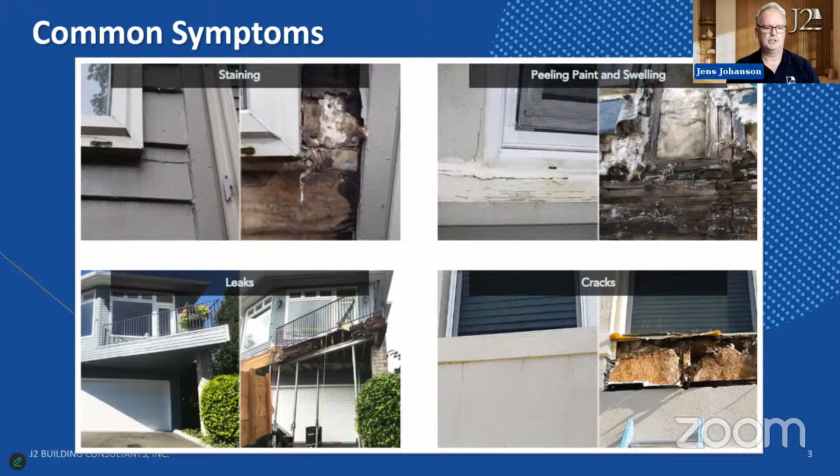So anyway, we're going to jump into common symptoms. These are on our website - if you go there, you'll find a page called Common Symptoms. We're looking for staining, peeling paint, cracks, and maybe bounciness of decks or roofs, sponginess, and water coming out of these areas. Here's some teasers, but you'll see this on our website. Carolyn's going to put some things in the chat, some YouTube videos or common symptoms there.

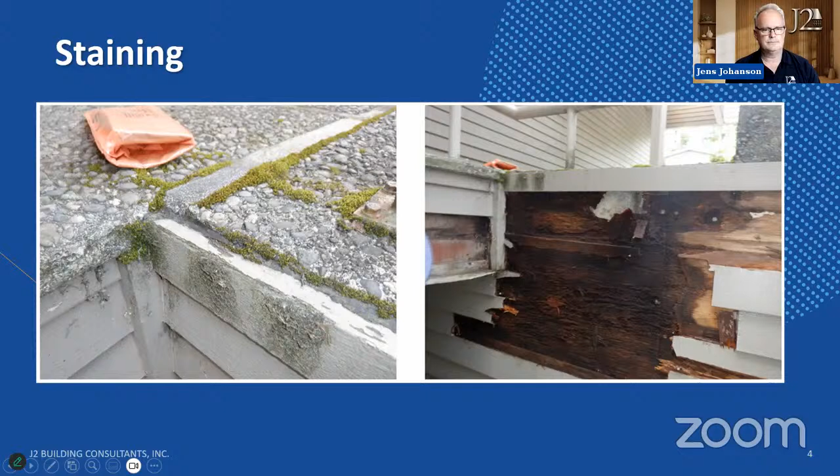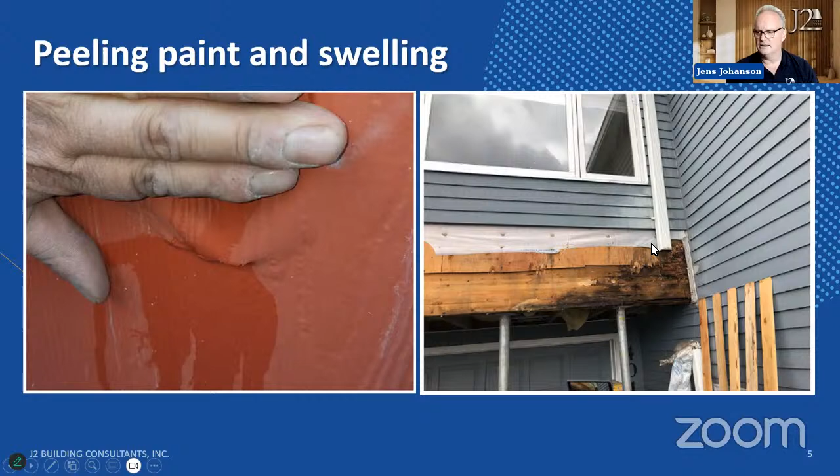Why do I have moss growing in my patio, and why does it seem like the water is running down the siding? Well guess what - it is running down the siding, and your plywood now looks like a big mess. Why do I see these blisters with water coming out? Why do I see some funny shading and staining on the siding here? Well, that's because we've got water leaks in there. These are symptoms of ponding water.

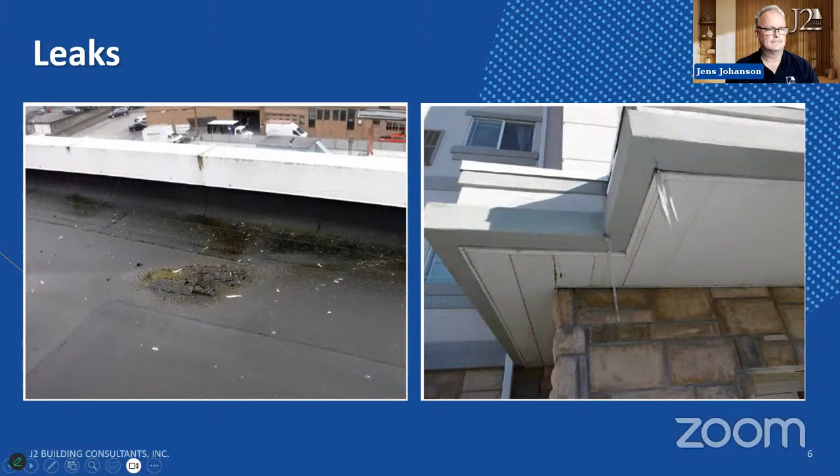I've seen icicles come out of ledgers or gutters, but we shouldn't see icicles coming between the gutter and the roof sheathing. And cracks can matter - here's a big crack, here's some water staining on it. When we pull that away, whoa, we see some problems. So these are symptoms and what lurks under them.

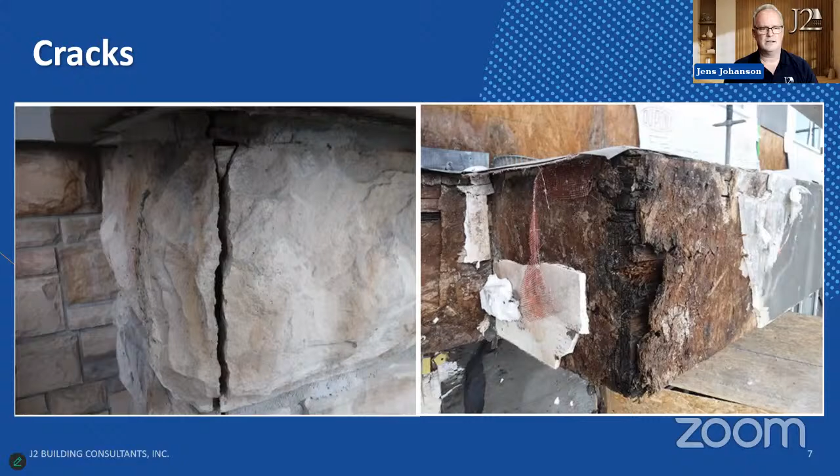Now let's jump over to the case studies. So 1 of 18, we've got lots of these. This one is the most classic walkway kind of thing. If you've got an elevated building, you're going to have walkways, staircases, all sorts of things. Here we can see the beams, some of the rails, even the beams on the outside - they look fine. We pulled off some siding to peek around, but you can see the sealant.

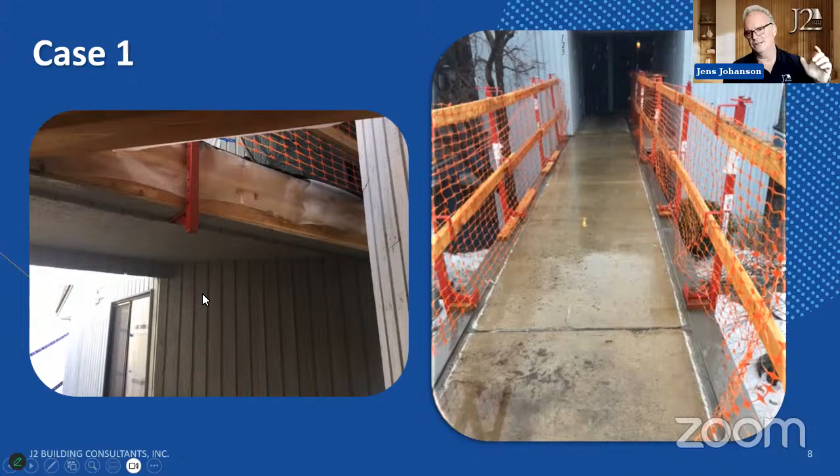So who has installed the sealant over the years? We've got a few different colors of sealant, so we know they've kept applying and applying and applying. Actually, we had finished our investigation here, and it was right at the end where we literally went over and knocked on a beam to see what was going on inside. And so this is what we found.

We can start on this right-hand photo - you can see it's pressure treated beams, you can see the pressure treating from the outside, you can see the knife marks. But on the inside, the pressure treating only goes so deep - the inside is totally rotted out. These beams are basically hollow. So it's a combination of beams and posts.

Here's some big support beams that come into a three-way T intersection. There's a lot of load being carried here, and there's not much left of those beams. Here's some cross sections of a post - again, 50% of the post is gone here. Over here, it's 90% of the post.

So a real good reminder that we can look at the outside and it looks fine, but you start just doing a variety of things - why is it hollow, why is there staining here, why are there weird cracks, where is the staining coming from, why are there 5 different colors of sealant, who's caulking stuff to death. So we've started looking at beams and posts in a whole new way after this project, and there's actually some interesting tools that can help us with that.

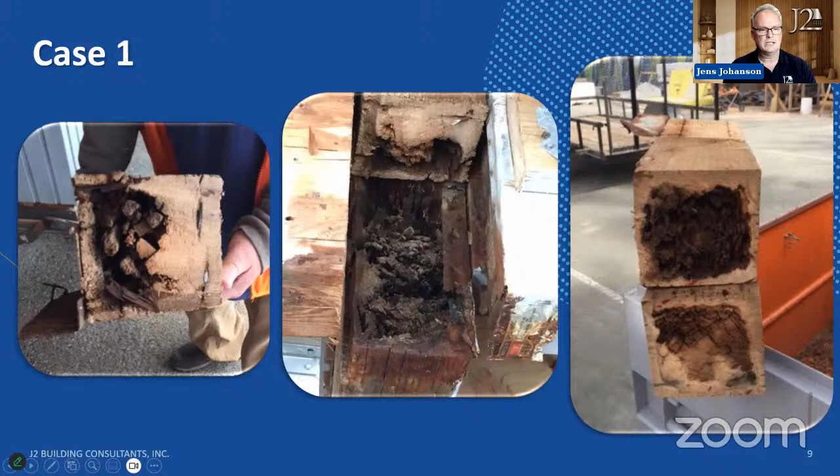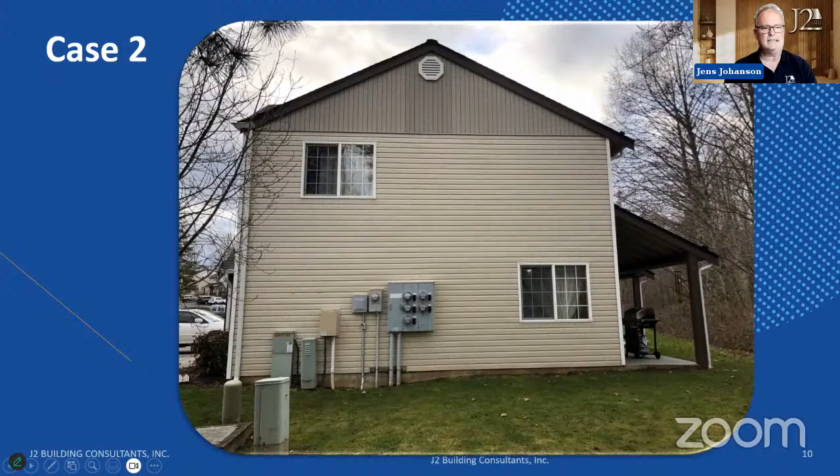Thankfully it's vinyl siding, very easy to pull off. If you have vinyl siding, it just unzips and then you can zip it back up. So if you've got vinyl, it's easy to look. So here's what we find underneath.

On the second story, you can see the water coming in from that roof leak running all the way down. Here's that panel, I'll show you a couple photos of that later, but look at the second floor with its excessive steam and moisture buildup.

We've got multicolored OSB water damage on the outside of it, but it's really coming through in these stud bays, if you will. You can see the clean areas are where the studs are. And what we found was they were totally missing insulation in the cavities.

And there was complaints of this unit's always cold. That's why I have the heat cranked. Well, we have the heat cranked, so that's why we're condensing on the cold windows.

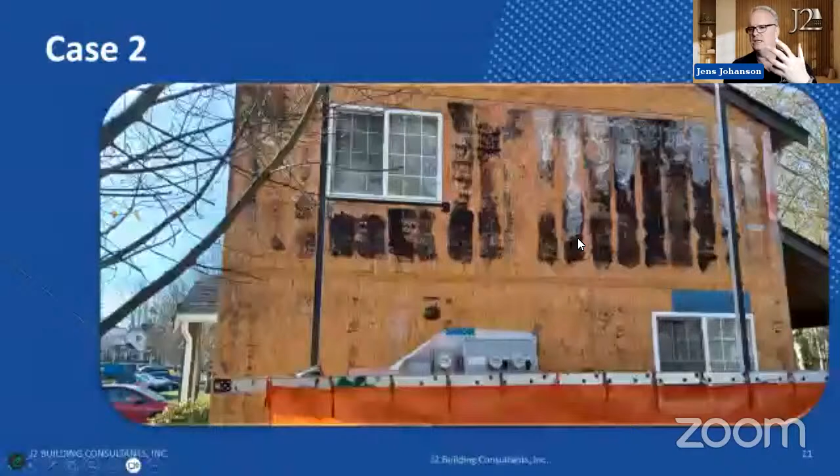So this whole second story wasn't insulated right. And warm water vapor from the inside was traveling through the wall and condensing on the cold wall on the outside, creating an effect called vapor drive. So the warm, moist air was coming through the wall and condensing and damaging this sheathing.

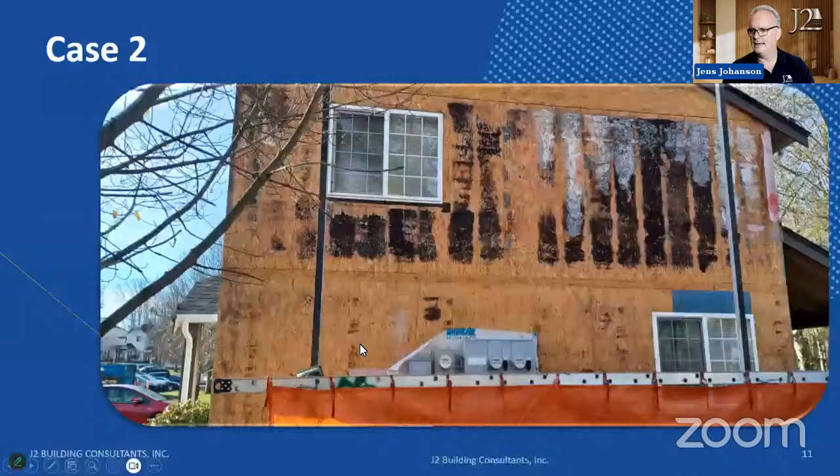And here's some close-ups of the meter panels. We expected to find this stuff because we didn't see flashings above these. We didn't see routine things where we expect to see them.

Here's more of that corner damage. It's interesting that this building has a couple of different colors, a pink weather-resistant barrier and a white weather-resistant barrier. So there have been either differing repairs, or during construction they were using different types of products and didn't quite get them integrated well either. So it looked great on the outside until you open it up.

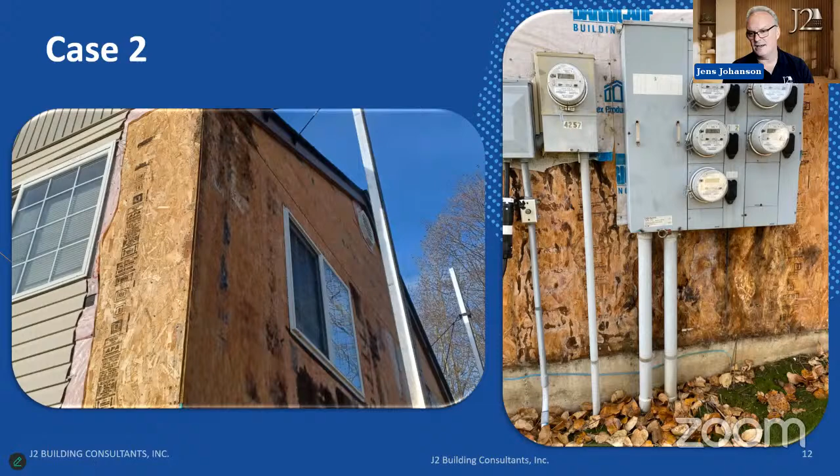Okay, we're still on that same project, still case number 2. And here we're looking at decks, because the community had reported: hey, we replaced the decks like two years ago and we're still leaking down into these closet spaces. So you can see we've actually pulled the deck off now, and there's so much damage at that door threshold transition, or what's called the deck to wall transition.

If this isn't flashed correctly, all the water just flows right in behind and right down. Here's what's left of your beam or header that holds up your deck. Your studs are gone, they're supposed to be studs out here. These two remained, we got about half of one there. You can see just tremendous amounts of water damage at the deck to storage units, or deck to wall transition.

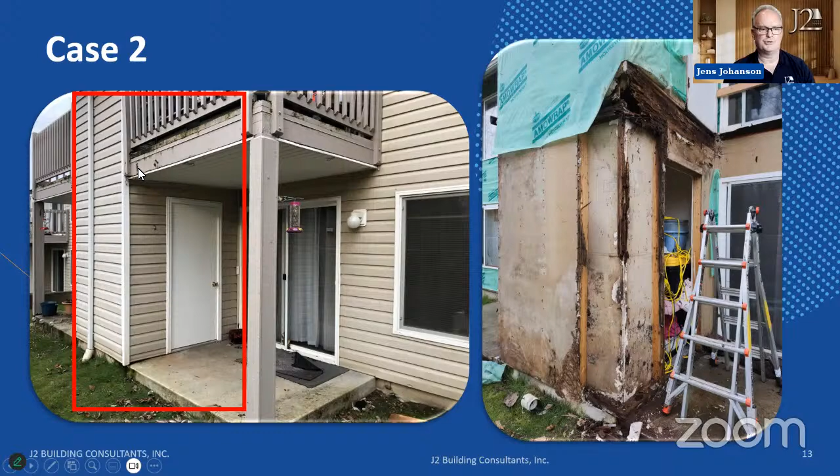All right, case number 3. Here we have an interesting kind of 60s, 70s looking little roof wall siding deck rail sort of thing with a triangle cut out, fancy at the time. But you got a lot of water running down your roof. And we have a couple of different transitions.

We've got top mounted rails. We've got a funny transition where it drains off the deck into a gutter. So in this instance, we had leaks in the windows below these, as well as living area leaks from the ceiling, which is the deck above.

And so you can see here's the outboard edge, we're looking at that. We have some funny ventilation holes that somebody had tried to ventilate this deck area, which needed to be done. But there's so much water coming down that no wonder it leaks through the window and around the corner and through that wall.

So what we did was we opened these up in a redesign and changed the railing system, changed the deck system so we wouldn't be funneling water down into that area. So, but just oof, the decks were hammered.

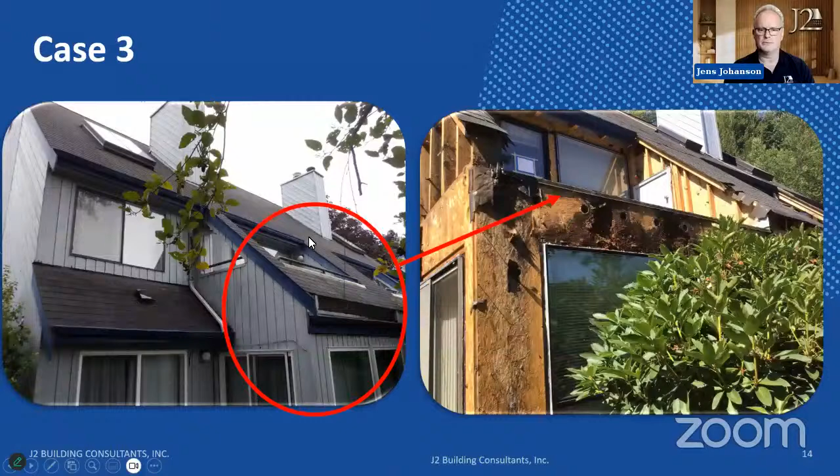You can also see the chimney siding is buckling, so we had problems there. We had problems with skylights. We had all sorts of problems there.

Okay, case 4, more decks, more storage closets, more chimneys. Chimney to roof, for whatever reason, chimneys are always disregarded, overlooked. So it's wall meets roof, and then here we have roof meets deck or wall. In the next slide we'll have another picture of that.

You can see the water damage again in these storage closets. This guy's putting firewood in his storage closet, but whatever, it's his storage closet. And you can see the water damage pouring all the way down from it.

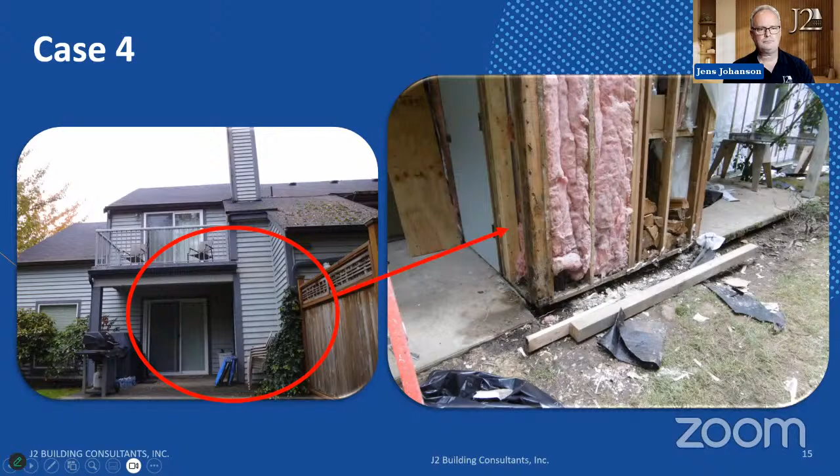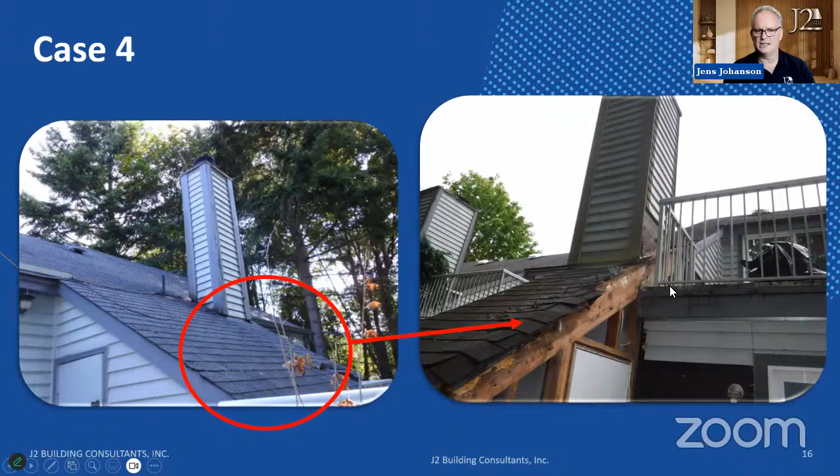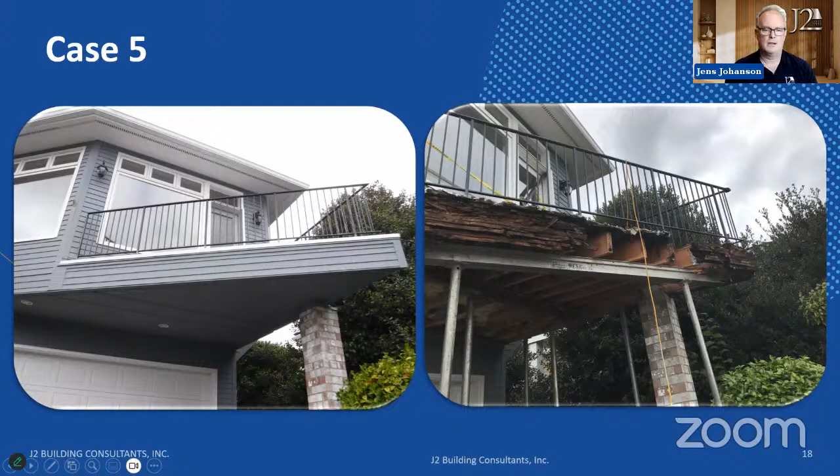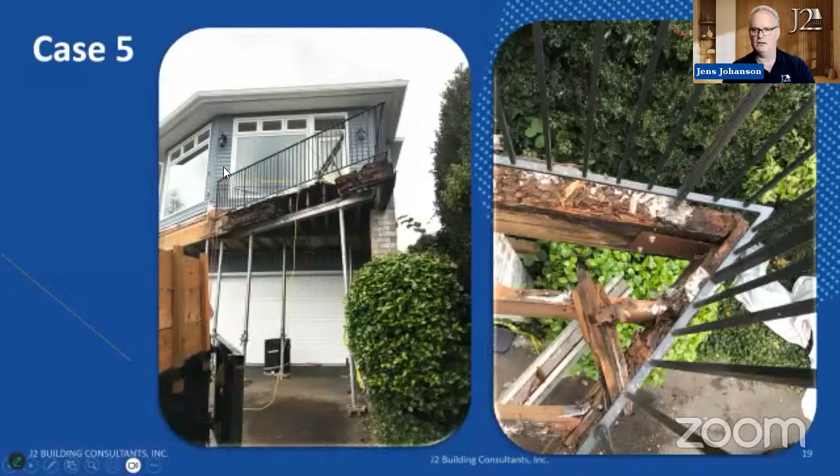Some more top views or side views. Here's the top, we have a big beam and a beam bucket, and all of a sudden there's no support there. So really hammered. But somebody had dutifully painted it, they had caulked it, they were doing what they thought they needed to do. They just didn't stop and say, is it right under here? Doesn't feel good.

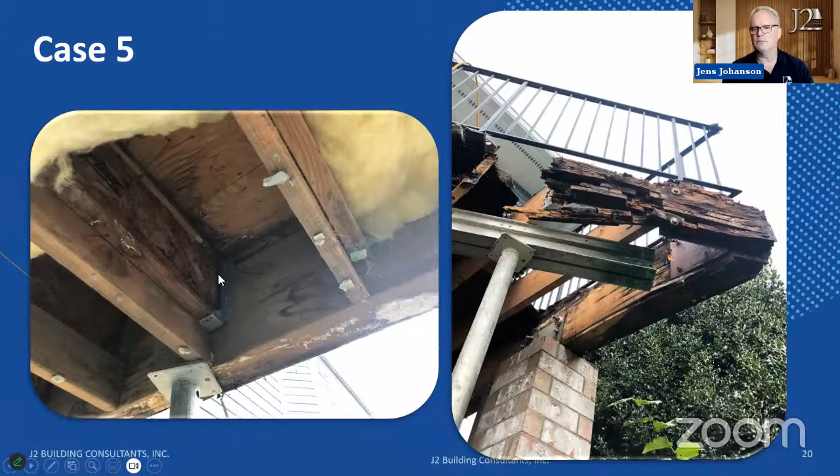More of that. If you just had opened up the soffit a little bit, you would have been able to see the deck tile membrane leaking and damaging those things. Remember that deck in the previous photo? It looked like it was sloping down into this intersection. Well guess what, it was - because again, no more beam. So this is really pretty dramatic water intrusion.

Here's an inside corner, but below a roof to wall, it's called. So the roof intersects with the wall here, and it wasn't done right, so water is able to leak down through. In addition, the windows weren't installed right, so the windows are dumping some water on it. But the window water is really on the outside of the sheathing - the roof to wall got in behind and really made some damage to this corner framing intersection.

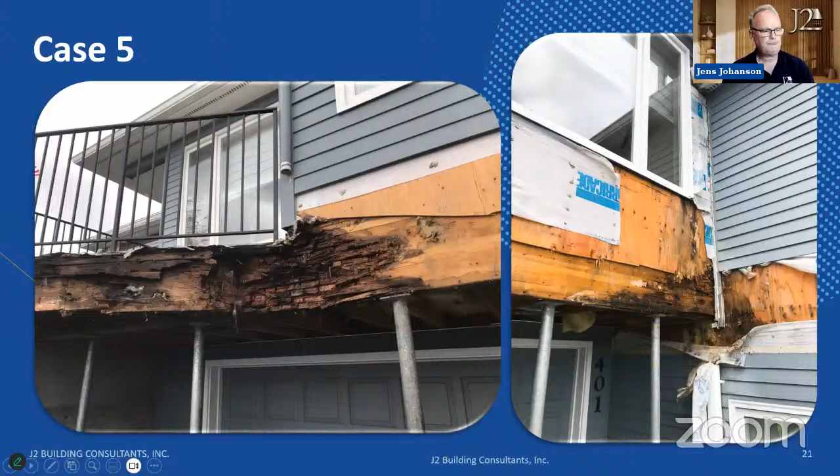All right, here is a classic. Why did we install - well, we had a series of owner replacement windows. So when you looked at the building, you could see kind of white, off-white, almond, different old metal ones. And then even some people going so far as to say, I'm going to put a super duper storm window over the top of my window because for whatever reason, I've replaced these windows and they continue to leak. So why am I continuing to get leaks in my window?

Well, you're getting it from the window above. You can see the WRB is actually mislapped with that - it's called a penetration flashing, it's a bib, so it needs to be on the outside. In this instance, their rain coat is tucked into their rain pants. So all the water that runs right through there runs right down, damages the gypsum sheathing, and gets in behind that window head. And even though this person's replaced their windows twice, they still leak.

Now we need storm windows - that'll prevent it from leaking. No, it doesn't, because it's leaking kind of from the inside out.

Water is able to run behind the siding before it gets to your fancy storm windows. And so you can see this is gypsum sheathing. It's supposed to look like drywall. Think of it like drywall, but it's for the exterior.

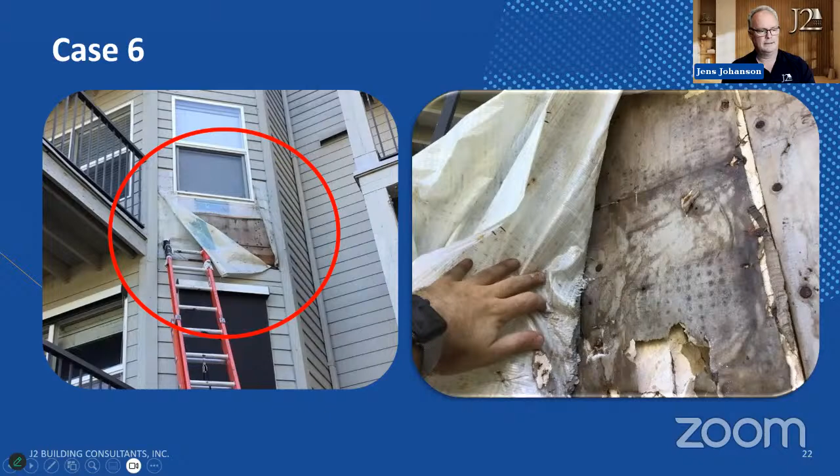Okay, case number 6. We're looking at this and we're going, wait a second. The flashing doesn't come all the way over. We have flashing between different cladding types, so we'd expect to see that, but we'd expect to see it all the way over here. And we have a bunch of damage around in this corner, and this trim piece is just getting hammered. So the flashing above this belly band again stops right at the trim and doesn't have an upturn or a counter flash, excuse me.

So let's pull it off and see what's under there. Sure enough, we've got water pouring down this flashing and dumping right behind it, causing problems. Here's the flashing that's above that belly band. It did have a little upturn on it, but it was still allowing some water in there, getting wet. Actually, your flashing is on top of the paper, so again, mislapped. It needs to be lapped correctly. Otherwise, we get water that then gets trapped here.

And so another problem with this is this poly building paper. There's poly style building papers - think of them like Tyvek. They're a woven poly or plastic. And then there's black building paper, and then there's some other kinds too. But your two most prevalent kinds are asphalt building paper or kind of a poly building paper.

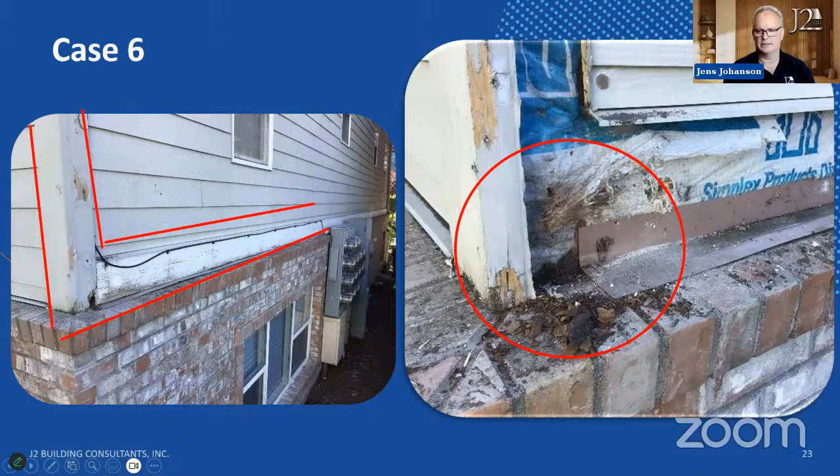So then the water is leaking behind, it keeps running down, so it's all behind the brick. That's why we have efflorescence and staining on the outside of the brick. So this brick had to come off. It was just a disaster that could have been caught with a visual walk around going, what is that? So I can just look at that and say, you're going to have water there. So that's the visual clues, not to mention the cracks and splitting and peeling and all that stuff that's happening. But those are the visual clues that we're looking for.

And then we're still on that same project and we're walking again. We're under walkways - remember, we talked beams and posts and stairs. Well, why do we have patches and funny panels and things like that? We open that up, and of course, here's the walkways that are leaking. And again, we can stick our screwdriver right through the plywood.

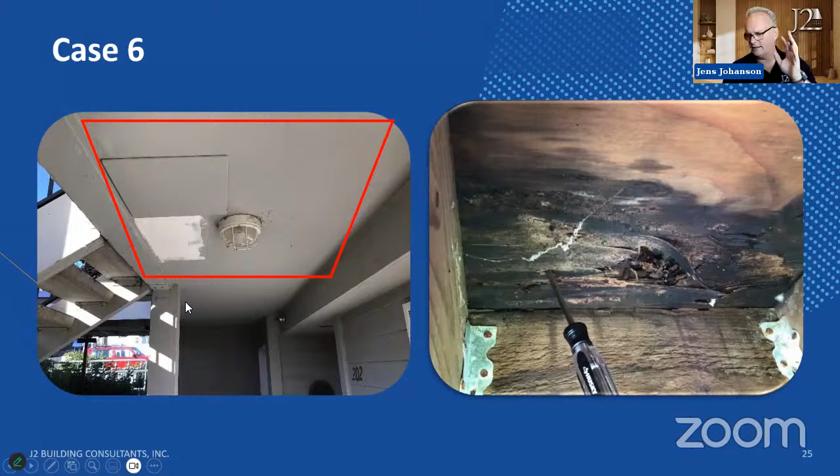You can see blisters here. So these are all visual clues. I've got blisters, I've got weird patches, I've got 3 different colors of sealant. There's probably something going on here. We should probably do a little bit of an inspection just to see what's up, and then we can fix it and keep this from becoming a gigantic issue.

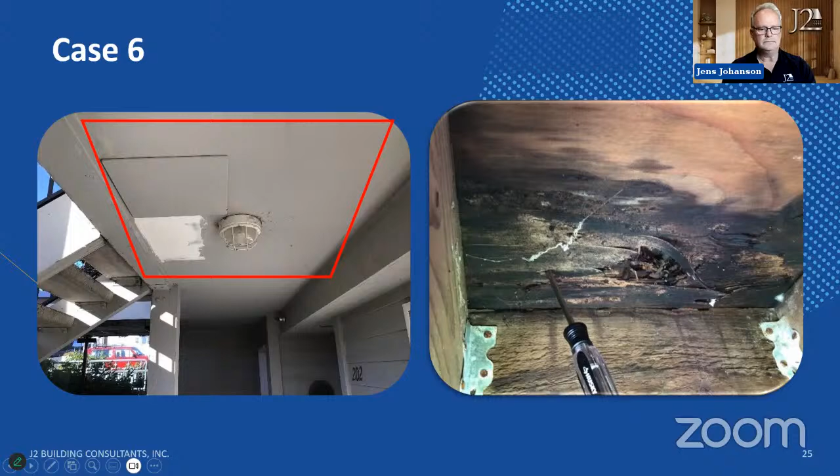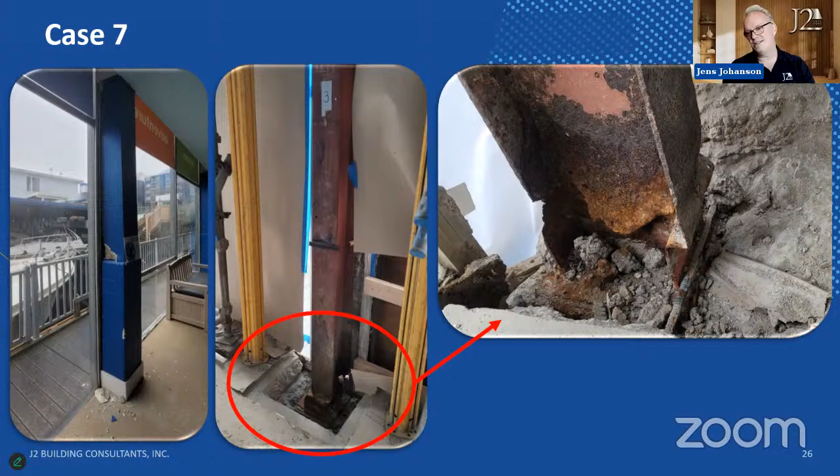But here you can see we've got shoring in place. We're investigating, we're shoring up the building, making sure it doesn't topple. Here's some of the drywall cracks and crumbles, and now the column is crooked, and there's lots of things going on in there. So just because you have a steel building doesn't mean that you don't have problems.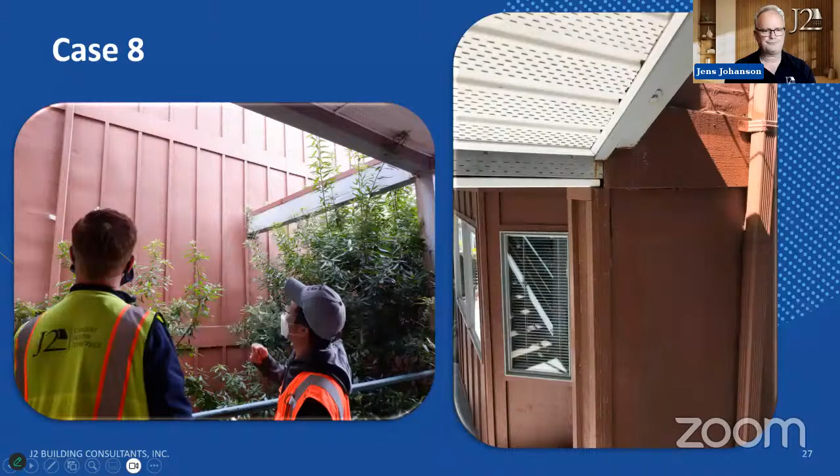I'm kind of like, why don't we open up there? There we go. So we open up where the beam meets the wall, and we can see the edge of the beam is toasted. The screwdriver can poke into the framing. The black building paper is so exposed to moisture, it is literally washing away the gypsum sheathing again. The paper is peeling off, it's disintegrating. There is so much water entering this joint that your WRB is washed away, your gypsum sheathing, fireproofing is washed away, and your structural support beams are deteriorating or just crumbling from the water damage.

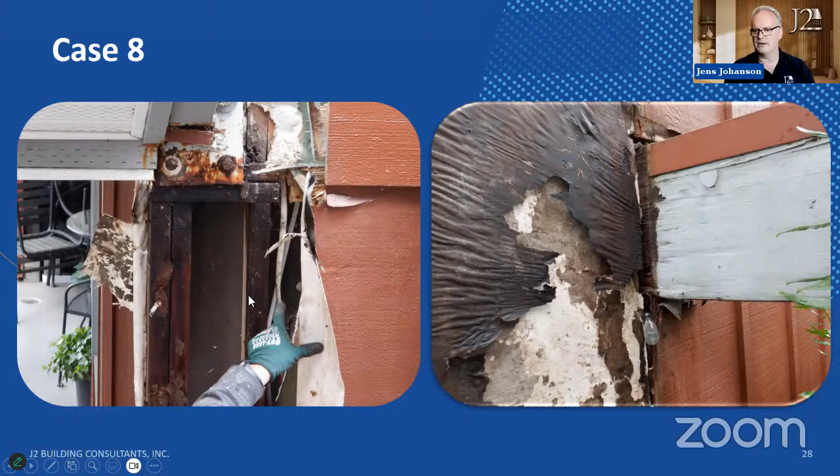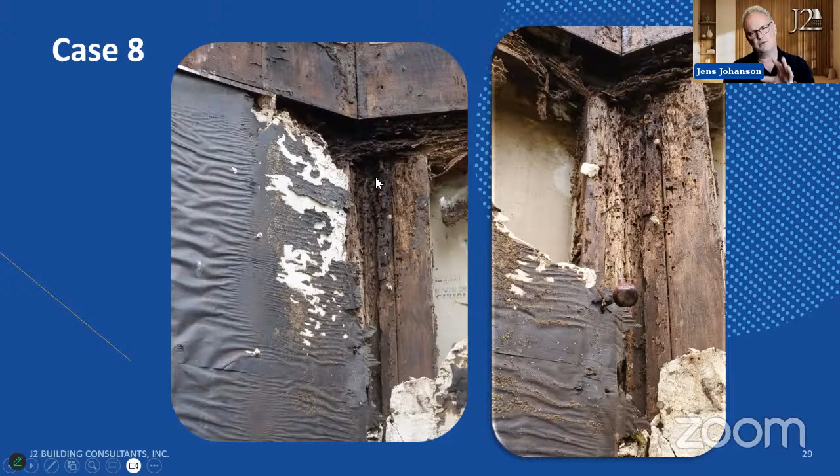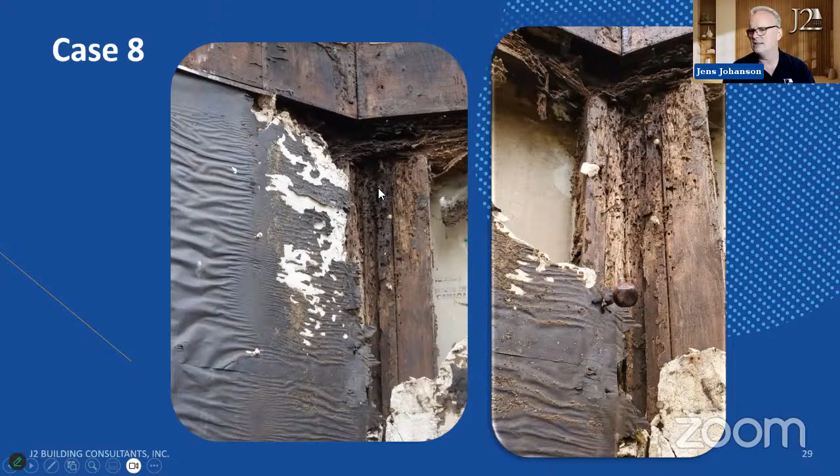So then we dig a little bit further and we even see evidence of pest infestation. Pests are interesting, ants or whatever they are. The scouts in the colony are looking for nice wet wood, because the baby ants with no teeth can still gum the wood, and the old ants with old rotten yellow teeth can still eat. So they set up shop at these wet, soft areas. And then that'll bring in a few others - where do the birds or woodpeckers start pecking on your building? It's not that the woodpeckers like stucco or trim or whatever, they like a high concentration of ants or bugs, and they're actually telling you where the water is.

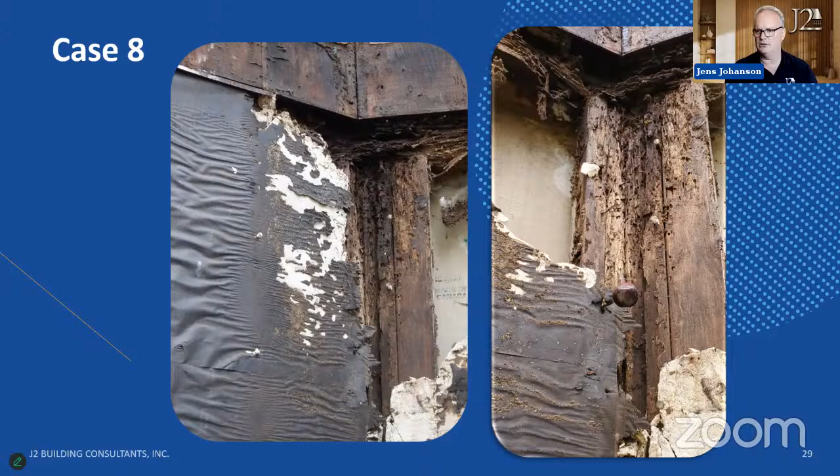So maybe I'll train a flock of birds to go diagnose some of these buildings. But this is - water gets in, causes it to be soft and yummy and marinady. Bugs come in, then your building just keeps falling apart.

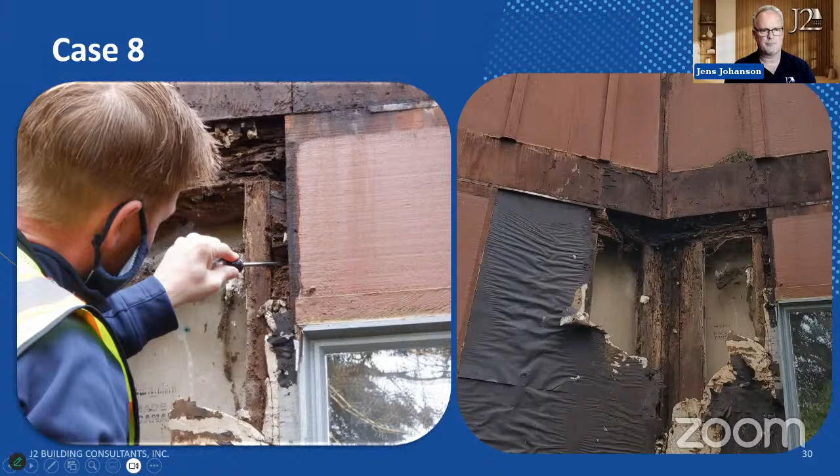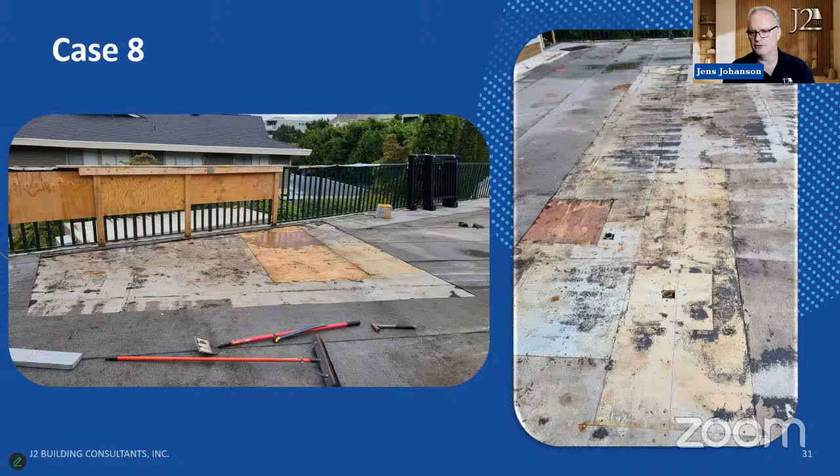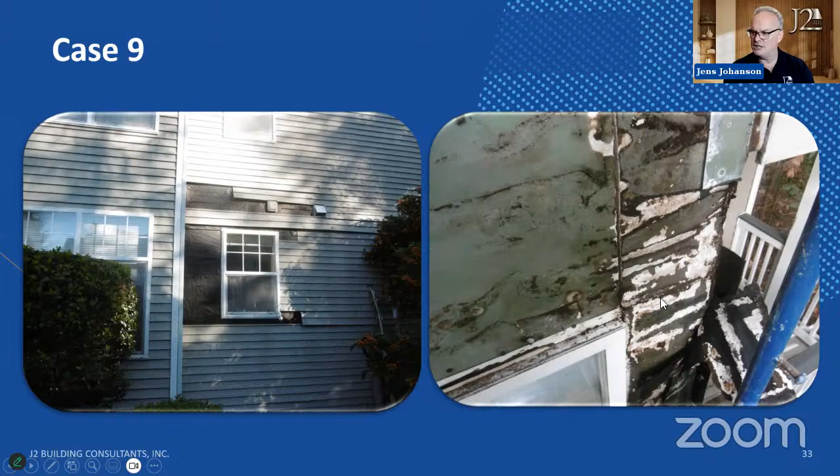We've got deck to walls that are leaking. Why does the deck upstairs leak? Well, it's pouring down—remember the storage closets were under here. Well, in this case, it's actually the living room or the windows that are there. So water's coming through the heads of the windows.

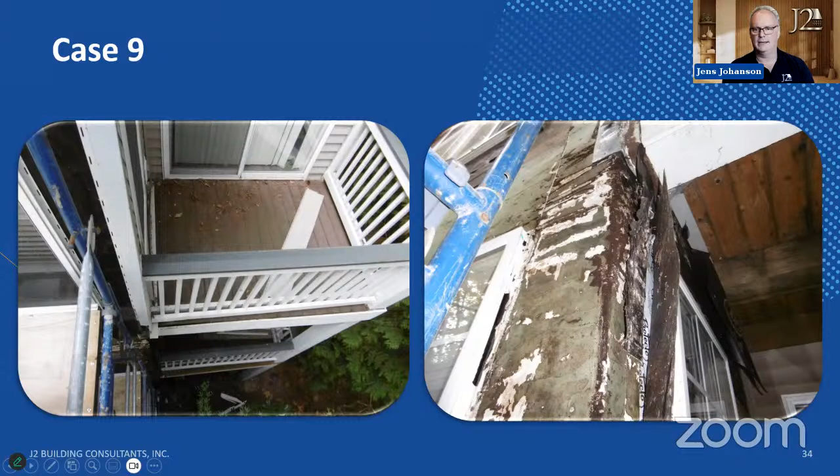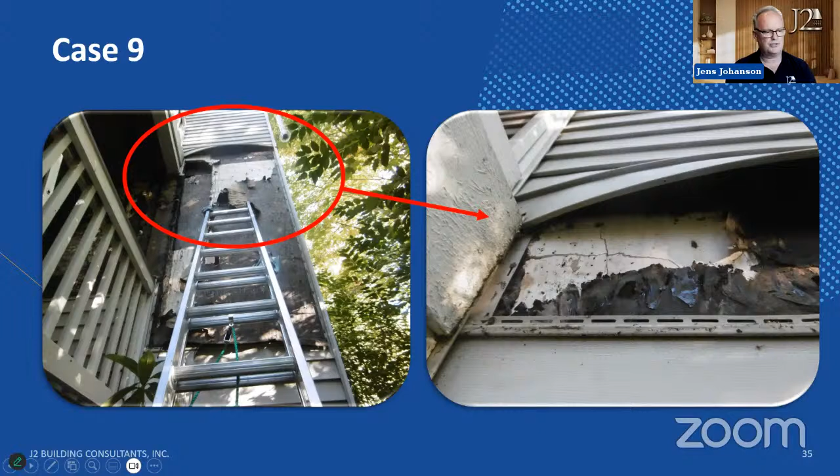Why is there water coming in? This is weird—it's your deck to wall transition. And then we can't forget about those darn chimneys again. So here's some more chimneys that meet a deck. Again, all these intersections become really critical to flash and properly install your paper and get everything watertight in there. And you've got a variety of subs here—a deck coating subcontractor, a sider, maybe a railing contractor, and windows. Everybody's working in this area, and they're probably all contributing to it.

But here's the investigator helper holding a piece of the sheathing that he's taking off, and again, we can stick a screwdriver through it. So this framing should look bright orange, not dark and wet with some stuff growing on it, and be mushy to the touch.

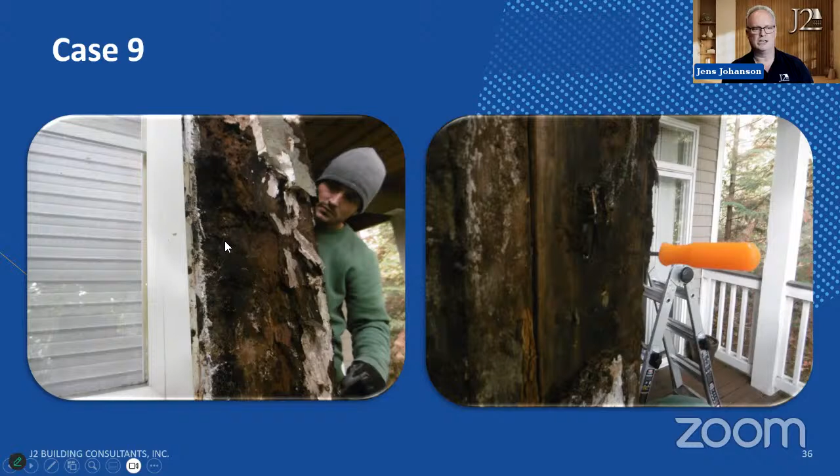Still the same building, more decks. Remember this deck—again, posts, pressure treated. You can see the knife marks, but the center of those posts and columns is just absolutely missing, and so we're losing all of our structure. We've got hollow posts and brackets. From the outside they don't look bad, but I got a little rust coming out of that nail, and I've got some other evidence that there's water leaking through, and some evidence that the deck maybe is leaking.

So when you put all those together, we have a couple of fancy tools called a drillometer. We can drill through that and see if there's good resistance. The drill bits come through the hard side, then go into the mushy middle, all the way to the other side, with no resistance. So then we can start saying, let's take a section of this and look at it. Very simple, easy to do, but keep your eye out for that.

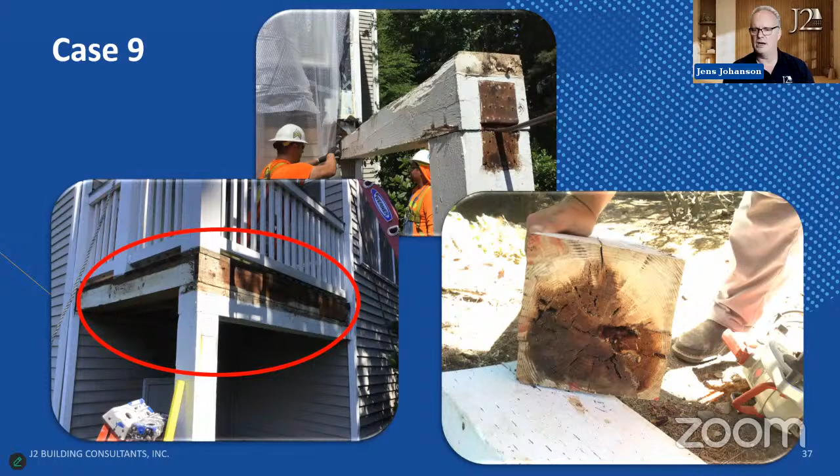Okay, this is a very interesting, older project. They were designing these steel trusses for a while that would be your first floor truss and then curve up and make like a walkway on the outside. You can see they didn't need to be that thick—they could be architectural and fancy. But they noticed that this soffit was peeling off and coming apart, and it's a masonry building, so it's stout, and it had some metal cladding on the walkways and even on the bottom.

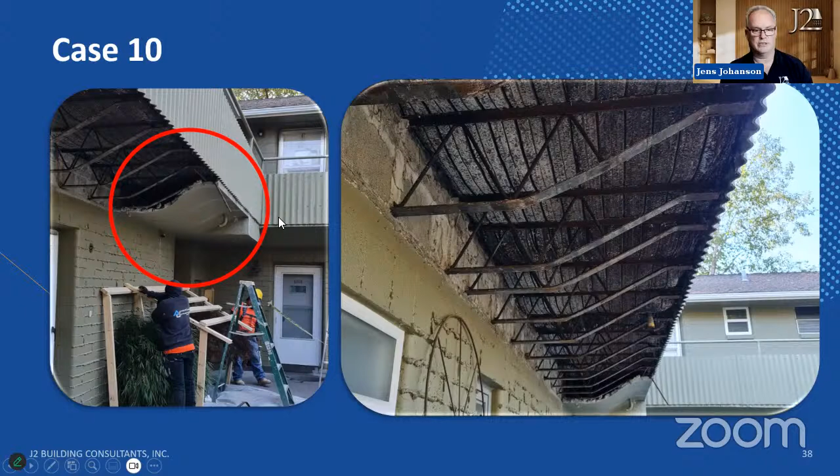We were seeing it fail, so we opened that up, and these steel joists are engineered particularly for this building and this load. Then when it starts corroding and the welds start corroding, you've got bigger problems. So we can see that the walkway wasn't waterproofed—it was a concrete walkway. It was allowing water in, and we're rusting out the structural components of the building. So that's what caused us to look there.

Okay, case number 11. Again, why is the siding bulging so much? Now, I understand you've made the residents replace their windows, but why is the siding bulging out so hard? Well, it's the biggest hornet's nest you could ever imagine. But again, look at the back of the plywood—the sheathing is rippling and stained and damaged, with lots of sheathing damage there. And the windows, all the retrofit windows were done.

Just do your best and caulk the rest—the fins were cut off, it was just squirted in, and that was expected to be a sufficient job. And each one of these windows was adding water to this siding system and causing it to leak.

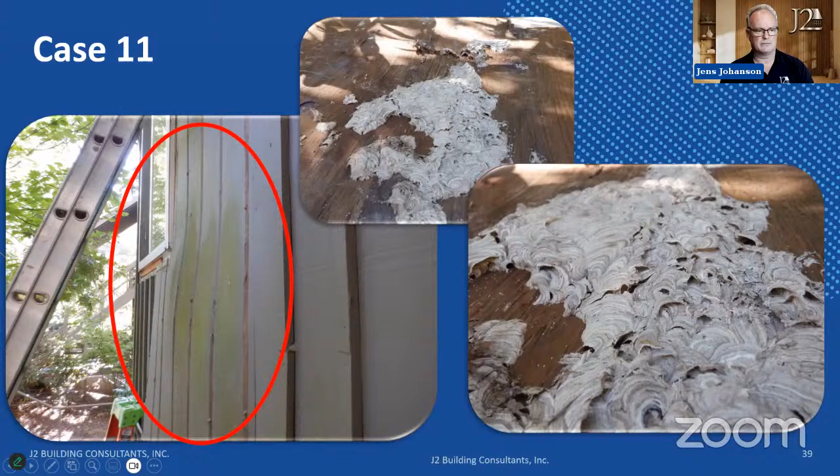So brand new decks, we just replaced them. They did it wrong. Sorry.

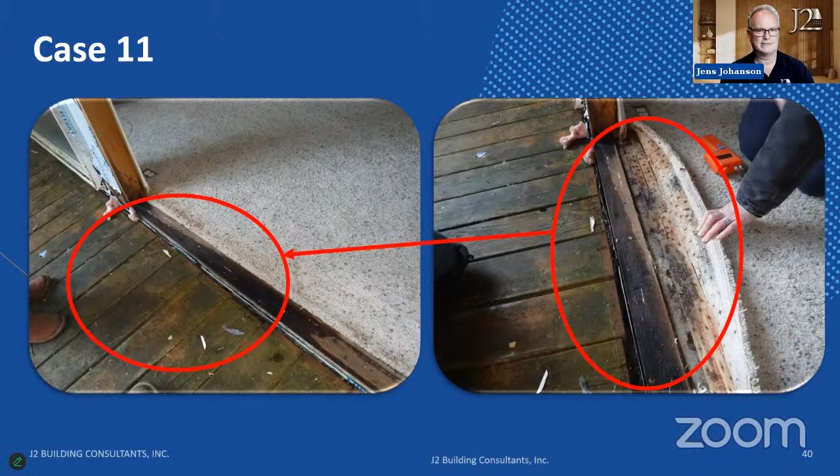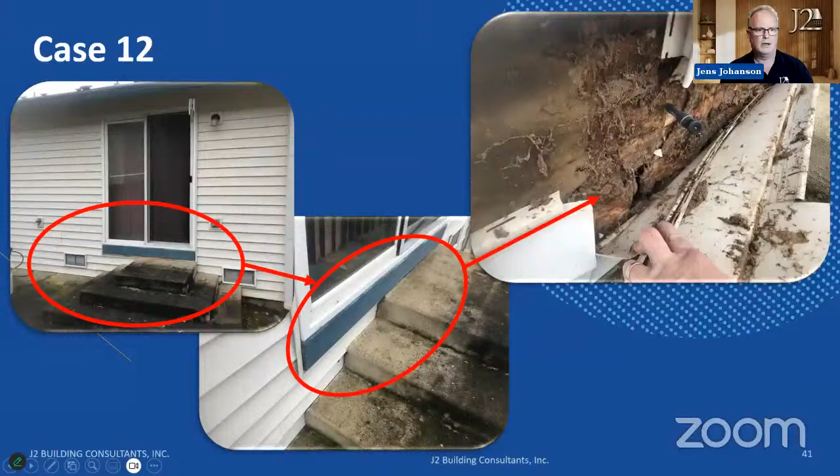Sure enough, we do. So, all right, now we're getting into EIFS. We don't see a lot of EIFS around as much as we used to. EIFS is an acronym that stands for Exterior Insulation and Finish System. Think about it as foam with a stucco finish over the top of it. The foam allows us to put in these cool grooves and maybe stick-ons that look like quoins or other accents. EIFS got a bad name in the 80s and 90s from a class action lawsuit.

The problem with EIFS is it's called a barrier system, meaning there doesn't have to be WRB or building paper under the EIFS to drain out. It's installed as a monolithic coating and then sealed, designed to keep the water out. Problem is, when that sealant fails, a little bit of water gets in. Now the water has no place to go and it's trapped.

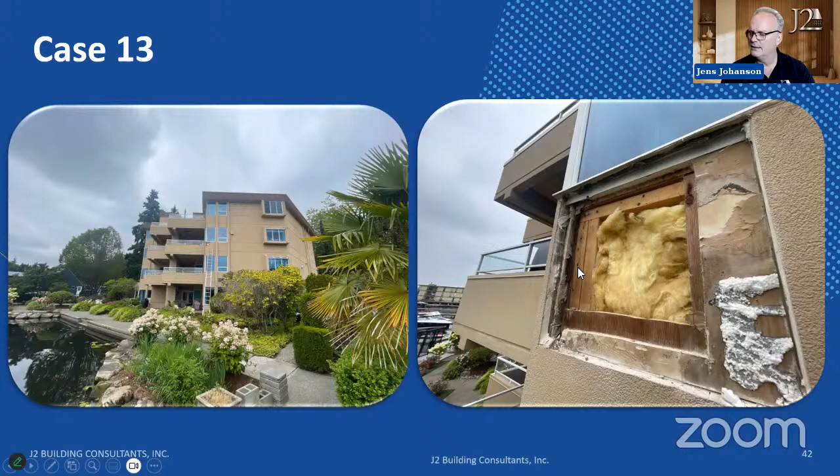So you can look at this building and go, yeah, looks pretty nice. But they had complaints of leaky windows and didn't know why, and asked us to come look at their building. Here you can see the stucco and EIFS in some places, here's the EIFS foam stuck to the gypsum sheathing. What you're not seeing is any building paper covering the gypsum sheathing, separating the foam from the building. So the water gets in at this sealant joint and leaks in, and now it's trapped and stays in there, and it even gets all the way down into the framing and causes problems.

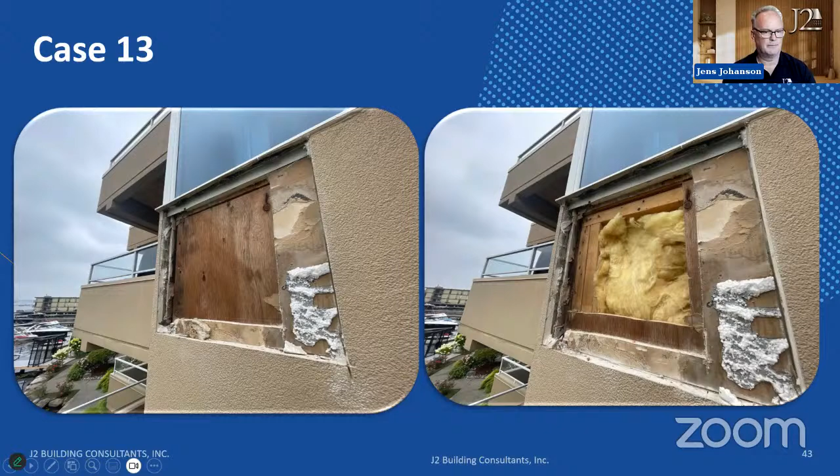I believe there's one more shot of it. Yep, here's the plywood, doesn't look very orange, looks pretty brown, actually lots of watermarks on it. When we peel that away, you can see there's even watermarks and staining on the framing, but your gypsum is toast there. And in this further picture, somebody's peeling away the paper facing of the gypsum, it's just delaminating and coming undone.

Here's that remainder of the foam that was troweled on, stuck on, and then coated. But you can see, hey, why is this crack? Well, now I've got an avenue for water to get in. Or if the window doesn't look that great, has some black junk leaking out, cracks and things like that, seems like the sealant in the window frame itself is failing. So the window now is starting to leak into the building, and that's what happens there.

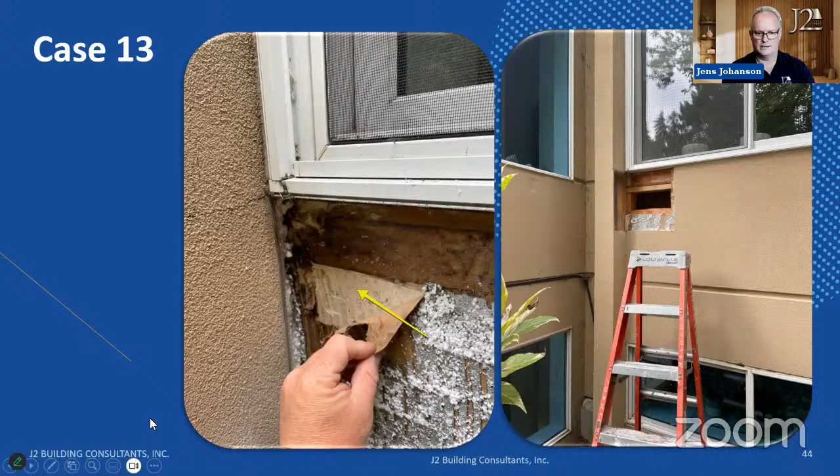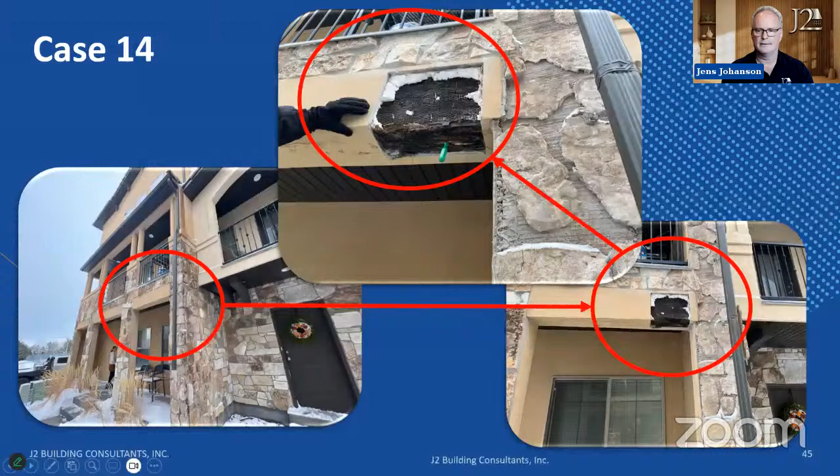I've got top mounted rails with bad flashing. I can see the joint at the end of the flashing in stone from the ground. I know it's not turned up, and I know it's not sealed right. So when we dig in a little further, getting behind the lath that sticks on the stone or EIFS, we can see the beams are shot. Any kind of papering is washed away. This is a stucco system.

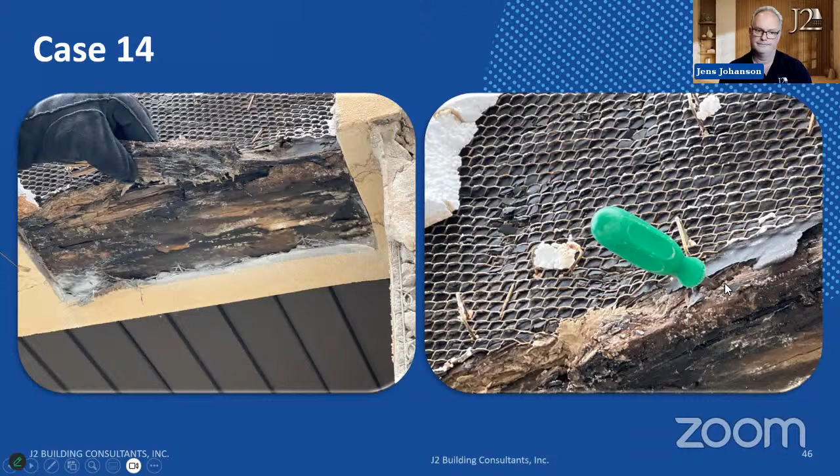It's not good when I can push a screwdriver right through it. The telltale sign was the brown tannins coming through that stucco. So we opened it up and found not much left of a beam. We actually had some stone falling off in this instance - why is the stone falling off, and why do I got brown stains in my building?

Caught by a visual inspection, but again, I can see flashing problems. I can see all sorts of other issues - why do I have icicles dripping off the end of the flashing where I can see into the stucco there? Why do I have funny extra sealant joints in the stucco? That's weird. So that's why you want to walk around your building and look.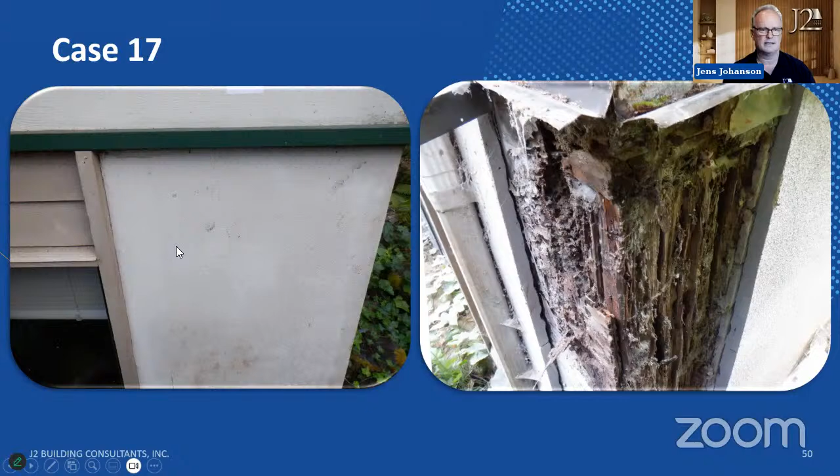Okay, last one. This project is 2 years old - 'hey, my building's brand new, I don't need an inspection.' Not really, do you? Okay.

So inside a deck wall, here's the wall and here's the building wall. We can see that the metal flashing kind of stopped at the outside edge of the wall. And here you can see, bumped into the siding, and they squirted some sealant on it. They didn't flash or put any membrane or sealant above the top of this and then cover it with metal. The WRB wasn't installed correctly.

Here's the crazing and cracking on the OSB sheathing, and we just pushed our hand right through it - we didn't need a probe. This OSB sheathing is your structural sheathing on the building, and it's just mush and lots of water. And again, 2 years old. On this side is the gypsum sheathing - lots of water damage and growth. Water is entering the top of this and can run all the way down.

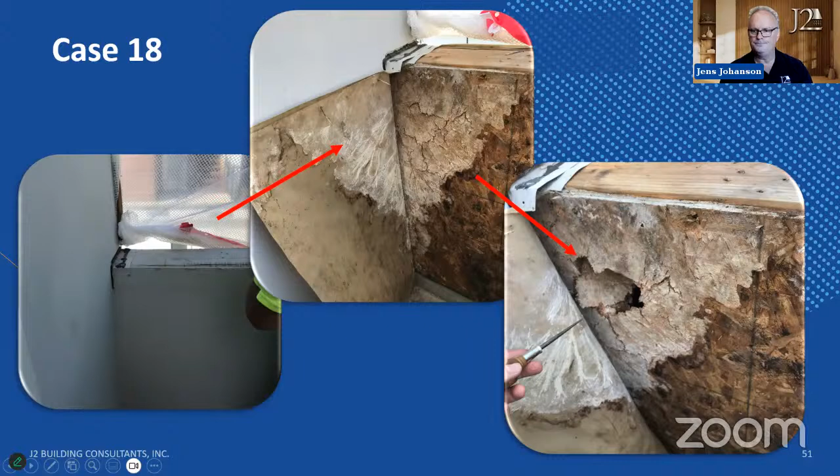And here we're on the outside of the building. It's a beautiful looking building, and again brand new. But here's your OSB sheathing, just gone. From this horizontal cap and roof transition, really messed up. Again, brand new - they expected it to last 40 years, the mortgage company expected it to last 30. And so this is how they started.

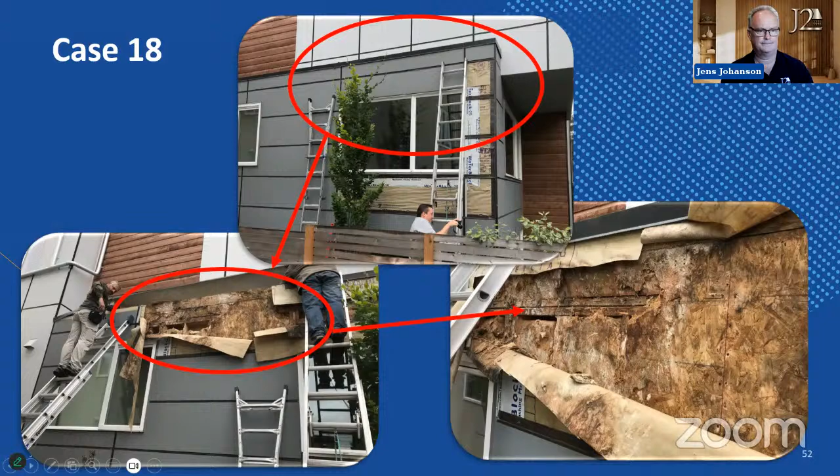A couple more pictures of that. But again, common themes here: horizontal flashing caps, scuppers, little roof scuppers, through wall scuppers that aren't done right. Top penetration railings, meaning your railings are screwed directly down through your deck membrane or through the flashing, as opposed to fascia mounted, screwed on the outside. And so those contribute to leaks all the time.

Here, I don't need a steel probe. I can use a plastic pen and stick it through the framing. And that's framing, that's the layer below your sheathing. So that's supposed to be a real hard beam or 2x4, etc. So we have problems, and this is a brand new building - looks sharp, and toasted already.

Befores and afters - a reserve specialist is going to look at that and go, yeah, 40 more years. And that's synonymous with going to the doctor and saying, you know what, let's do some little tests.

Do my blood pressure, do the basics. Now, maybe we should talk about, for ladies, let's get into a mammogram. Let's do an MRI if what we're seeing - we can go a little bit bigger with expensive tools, but we don't have to do invasive surgery like this. We don't have to pull things off, but until we have MRIs for buildings, pulling a little siding off and putting it back on and repainting it doesn't destroy the building, doesn't hurt the building.

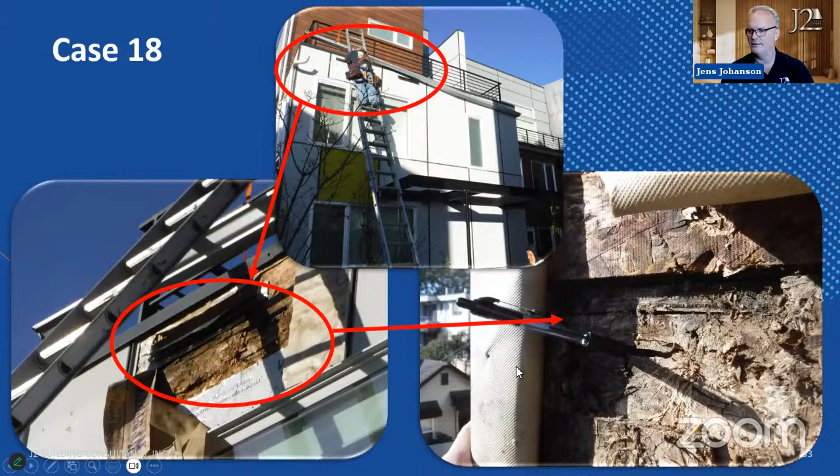Those are the differences between a reserve study and an investigation. And do we have one more? We've got one more. It's a good looking wall - it's at the bottom of a stairwell.

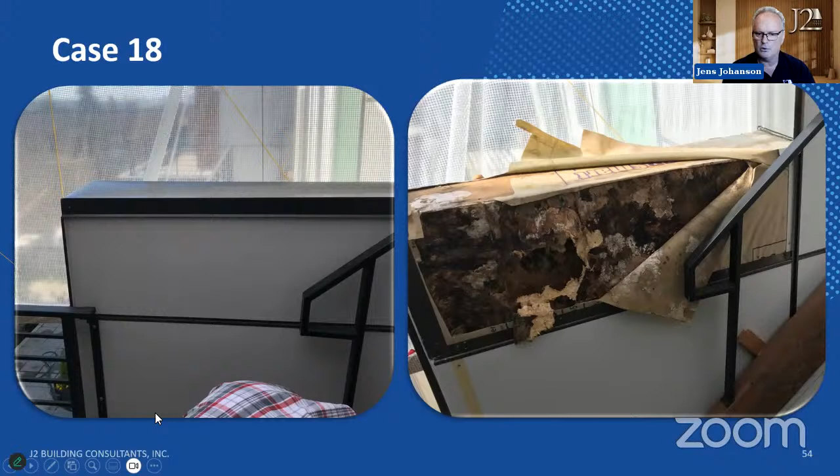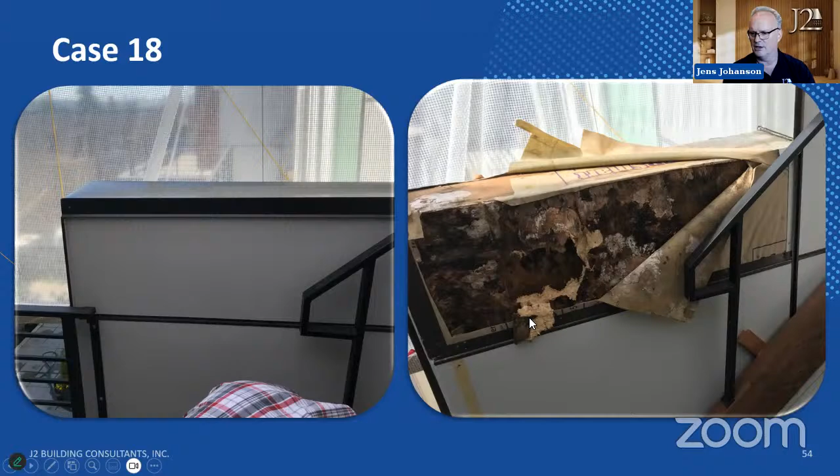And wow, look at that water all coming through, because you can't run your building paper horizontally. You have to use a peel and stick there, and your metal wasn't installed right. So water is just totally running down the wall. And here we're at the deck level - we're looking at a through wall scupper. Scupper isn't done right. This whole thing is mush.

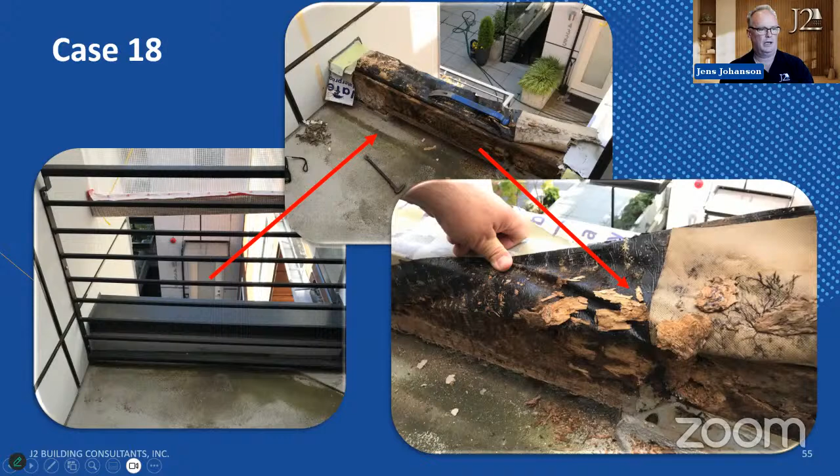So, all right. Have we scared you into denial? Or are you like, no, I don't want to see it? Okay, well, those little leaks and little problems are going to get worse. But hopefully we're not trying to scare you. We're just trying to say, look, a consultant or a project manager, someone who's helping you - we're not selling you a piece of product. And so we're not giving you a free roof assessment to then sell you a roof.

My favorite thing was I brought my car in for tires, and it was jacked up on the lift, and he took the tires off and then came and said, your brakes show wear. Would you like your brakes replaced? And I kind of laughed and I said, I'm sure my brakes show wear because I use them coming in here and I use them every time I drive. How much wear do they have left? And he kind of paused and he said, oh, they're 40% worn. And I said, yeah, great, so I've got 60% left. Yeah, okay - kind of hung his head and turned around and left.

And I was like, I don't need to replace my brakes right now. Thank you for letting me know that they have wear, but I've got more than half of my useful life left. So again, your reserve study is saying you've got a 20-year product, it's 12 years old, you should have 8 years left. Let's look at them - let's pull a tire off and look at the brakes and say, yeah, there's nothing wrong with them, or they've got all sorts of grooves in them. You've still got tons of pad, but they're scratched.

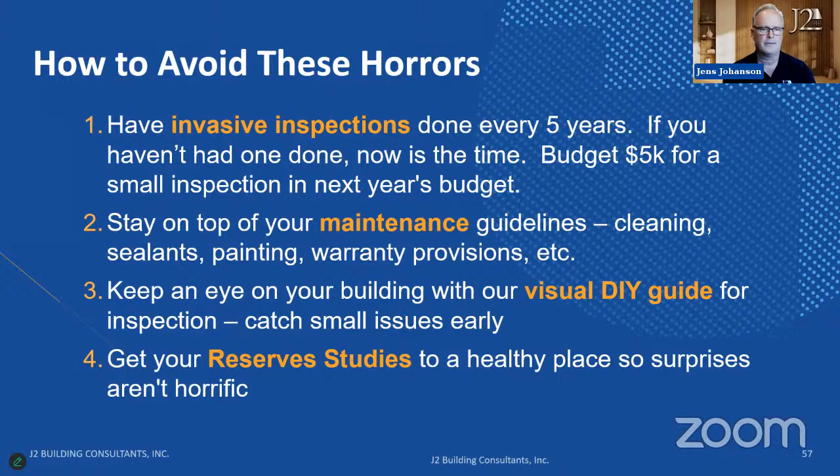So this is your reminder: get your reserve study out, dust it off, make sure it's healthy. Okay, and then here is the inspection guideline.

Your building may not look like this, but I can guarantee your building has windows, siding, roofs, railings, decks, walkways. Maybe it has patios, planters, below grade parking, but you can take yourself through this and just go, hey, what's number 8? Gutters and downspouts, how do those look?

Great time to look at gutters and downspouts is when it's raining. Put on your raincoat, walk around. Why is the water coming out of the gutter? It's supposed to be in the gutter. Why are the drains backing up? They're supposed to be working correctly.

And so again, little tips down there: signs of damage. Do we have growth buildup, decay, cracking, bulging, swelling, all these things? And so you can make a little list and then call a contractor to help you with that.

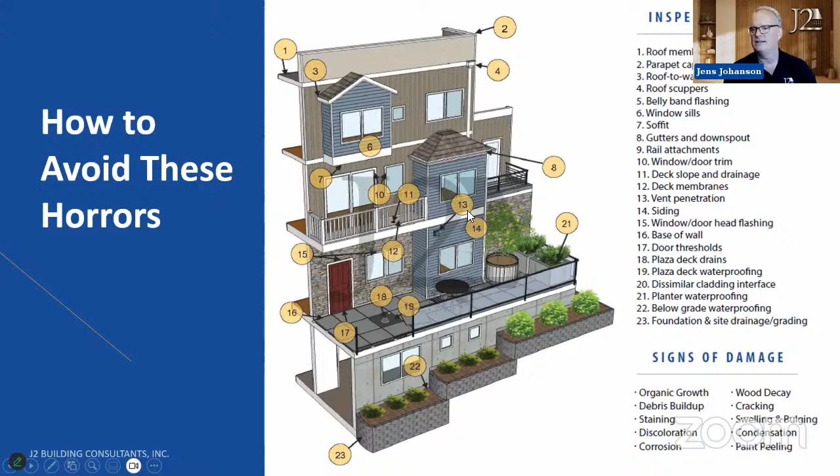Or you can schedule with us and we'll put some schedule links in there. We can do it all for you. We understand you're busy and you work full time, so we can do what's called a wellness check. It's just walking around your building with a trained set of eyes, going, remember the picture of that flashing is wrong, it's going to be leaking. Or these stains are in a beam and it's a key area, and that deck looks like it's going this way and it's supposed to be going this way. And so that's just wrong. So we can do that for you, or you can do this. Bottom line, it helps you in your next steps to get that going.

So Q&A, we're done with the scary pictures. We have a few questions that are sent to us throughout the month. Everybody can do that, you can send your question anytime you want, we'll probably answer it for you right away. But we wanted to bring this back to the people. Hopefully this helps you guys.

So the first question: will I need to vacate the building during an invasive inspection? For visual inspection, absolutely not, we're just walking around the outside, maybe the inside. For an invasive inspection, in most cases you will not need to vacate the building. The inspection team will work in specific areas and minimize disruption, but it's good to check with your inspector if any areas need to temporarily be off limits.

And then depending on what we find, if the deck is so disintegrated, like that one photo, we're gonna block off the deck, put up temporary shoring, and not let you use your deck, all for your safety. So, do you need to vacate the building? Nope, typically not. So how often and when should I schedule an inspection?

Oops, I'm sorry, I'm reading the wrong one. Will an invasive inspection damage my building? No. Again, we're pulling off small areas of siding, select spots that can be replaced and repainted. You might see that temporary opening for a while.

If we open it up and find damage, we'll cover it back up right away, weather tight it, and help you make a plan. Sometimes you want to call, if it's a brand new building, call the builder and say, hey, come look at the damage I found. And then he can come and peel back the plastic and go, ooh, that doesn't look good.

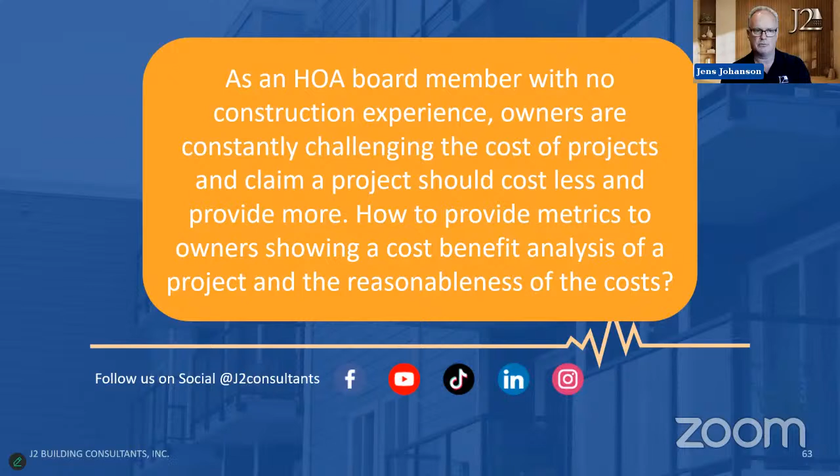And then reasonableness of the costs - go through a competitive bid process. We're going to give you an investigation and a scope of repair, help you take that out to bid, and go to 3 experienced contractors that have recommendations and say give us a price. They know they're in a bid situation and they're not just calling you out of the blue wanting to replace your windows. So we get pencil sharpened and go through a good competitive bid process. Number 2, have a consultant or project manager involvement and overview for reasonableness. They aren't selling anything, they're keeping an eye on the project for you and making sure it's done well.

Number 3, we talked about selecting good contractors who have a similar track record.

Number 4, seek other opinions. There's the consultant's opinion, so call the reserve specialist and see what he or she has to say. Call your manager and ask, is this making sense? Does the reserve study and the manager see this as a fix or not? And then your HOA attorney. Get all those people in the same room and have them debate. They've done hundreds of projects like yours, and they can say, how does this equate to the job down the street we did a few years ago? You can listen to them talk about it, and I'll call out and say, I don't think you need to do that unless you want to—in that case, go for it. So those are the metrics, helping owners understand the cost-benefit analysis of all that.

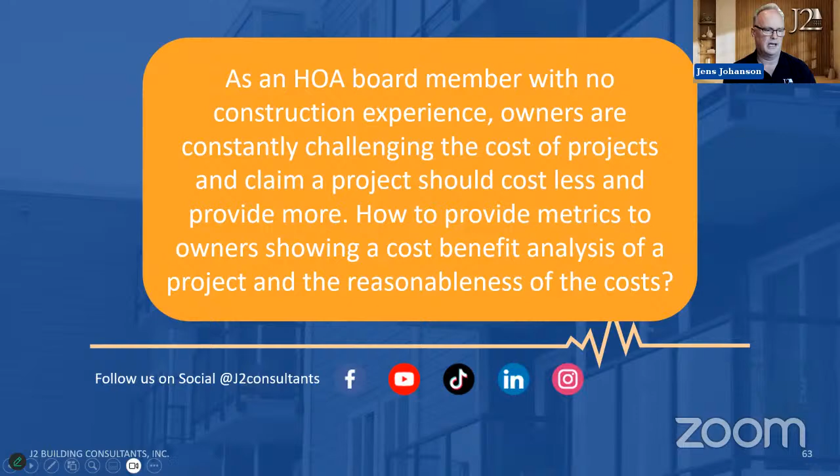First question: at what point is the insurance notified to put in a claim, or is this put on the reserve study for the owners to pay with increased dues? Fantastic question.

For the insurance company, you go to state law or insurance policy law. Every state has an insurance regulator, an insurance administrator—somebody in charge of all the insurance companies, making sure they're doing the right thing, honoring their policy, and covering their claims.

If it's a loss that's covered by insurance, then you file a claim—just like if a tree hits your house, you know you've got insurance for that, so you file a claim. It's not a lawsuit. Then the insurance company decides if there's coverage, looking for exact policy language and also for exclusion language. And that reminds me of a story: don't let them exclude their way out of it.